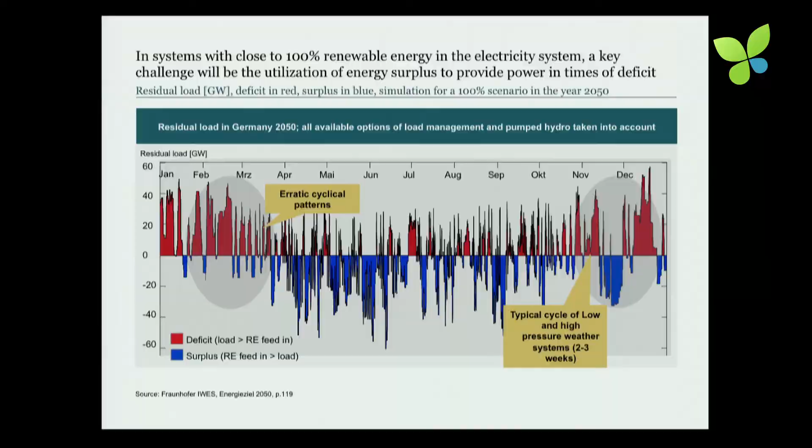And when you calculate these systems, there's a simulation of our colleagues from the Fraunhofer Institute of Wind Energy, then you can see you have to match a huge amount of energy excess into these time ranges where we need this from the point of the load, and therefore the task or the challenge will be high energy is incoming and you have to store it not only for hours, also for a huge amount of days, perhaps weeks or months, if we will feed a system with a 100% level of energy in the near future.

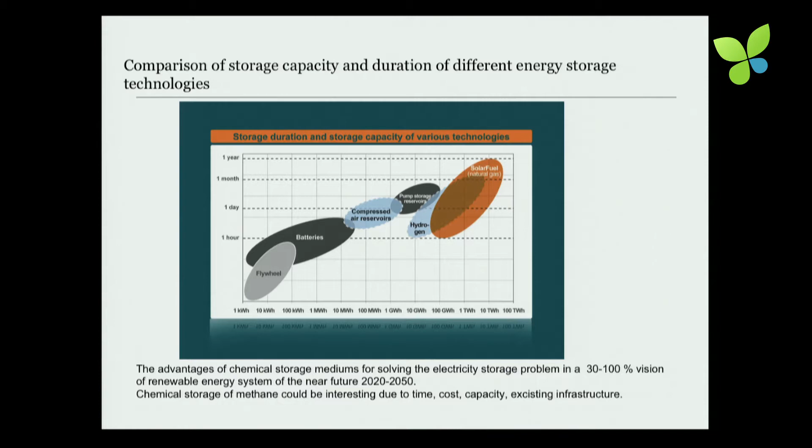And why is this important also to phase out a little bit about the possibilities of energy storages? Of course, we have the battery or flywheel systems which will feed us the energy for some minutes to some hours, perhaps, and we will need these energy systems, but in fact, you will see it on the right side, the chemical storage capacity of hydrogen or renewable methane, which is stored in an existing infrastructure, like the gas system, for example, then you can store a huge amount of energy and for a long time range. For example, not only for hours, you can store it for days or weeks, and charge in and charge out will cycle for these time ranges.

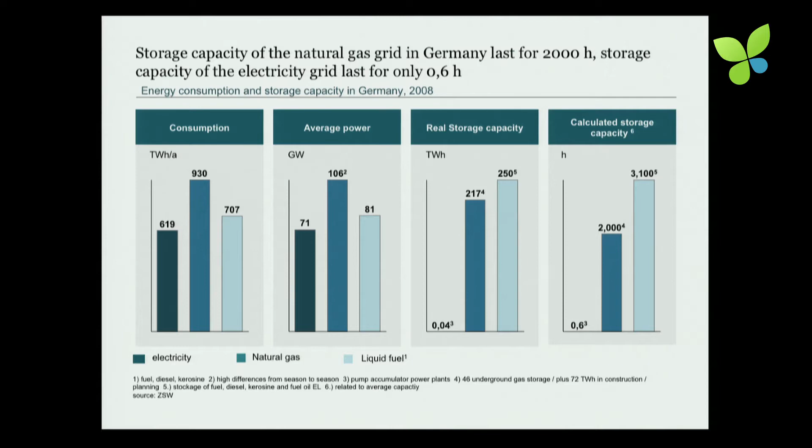And if you will see on the second bar here, the energy storage capacity of our existing electricity system, the bar on the left side, it is not a mistake. We have only energy from 40 gigawatt hours that will provide our system for approximately only half an hour or a little bit more, but not more at the moment, based on pump storage capacity in Germany, for example. And this will not be so different in a greater way if you combine it with Austria or Switzerland or Norway, because these systems also will be used by other countries and also face problems of connecting these units.

And if we can see the possibilities and capabilities of the natural gas system, this is the capacity of the natural gas system, which is existing, then you can see that it is quite a good idea, perhaps, to combine the gas system with this huge capacity of energy storage and its distribution system with the problem and the challenge of integrating and storing a huge amount of electricity.

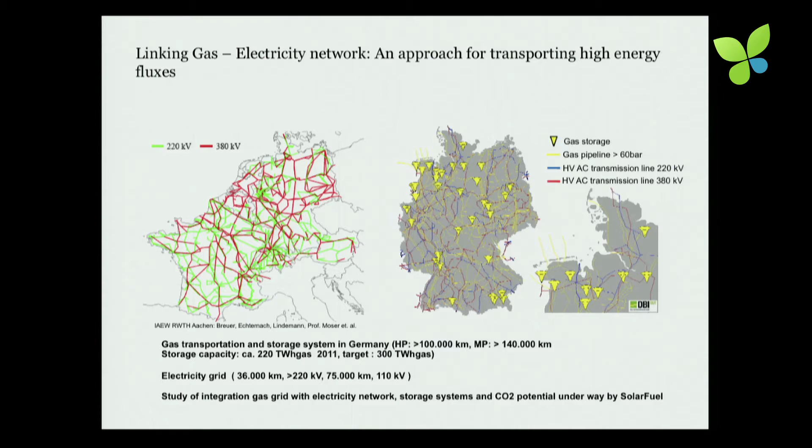And now the combination of this gas system with the electricity system is our basic principal idea. On the left side, you see the classical electricity systems faced by wind and solar energy, and we are matching our devices as a company which is engineering and procuring these energy devices like an electrolyzer unit and a methanation unit. And these two different units, we are combining. The system approach is our business.

And the electrolyzing unit, for example, to produce hydrogen, is a quite old technology, available since the mid 1900s. And we only adapt these available technologies for the future demand, for example, to operate it under dynamical behavior, facing the volatile fluxes of energy.

And the methanation, for example, is also an old technology. It was invented by a French mister in the 19th century, and he got a Nobel Prize for this technology in 1912, but nobody was interested to use CO2 as a reduction molecule to face it with hydrogen, for example, because nobody needed this. CO2 was an exhaust gas, but no reaction product for a carbon dioxide cycling economy.

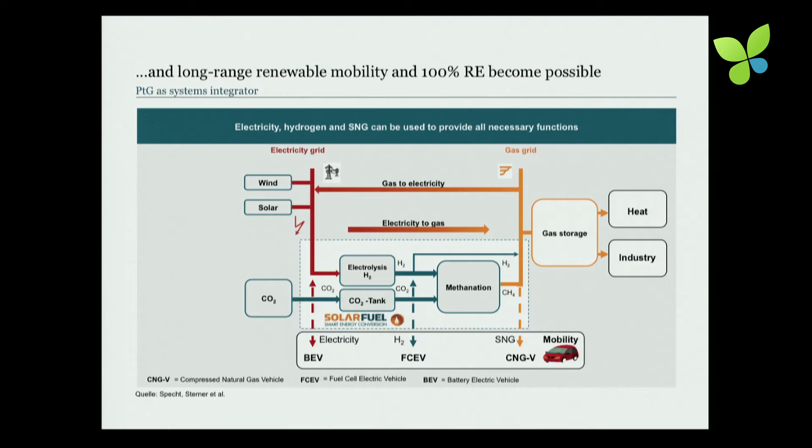And our basic idea is to integrate these devices based on electrolyzers and combining it with methanation. And the CO2 we will derive in the first approach from, for example, an existing system device as well. Biogas plants, for example: in Germany, we have over 7,000 biogas plants under operation, 10,000 sewage treatment plants, we have breweries and also ethanol production units as well, for example, steel and cement industry. These industries and these biogas plants are the most available CO2 sources at once.

We have not to invent or to build it up. This was not our business model. We want to face different existing systems and to connect these systems together, to put a part and an advantage for an integration technology. And if we had introduced the gas into the natural gas system, then of course we can reuse it for cogeneration, for example, for a gas turbine to produce electricity, but also the natural gas is available for heat or for mobility, for example, and that is also existing technologies.

And our basic principle is only to integrate it in the electrolyzer unit, which we will also buy from some manufacturing companies, and adapting these technologies in our way, in our efforts we need, and the matching of these electrolyzer units and the system integration with the methanation, which is also a technology which is quite available from the chemical fixed bed reactor, for example, which we also are adapting to our needs and system integration.

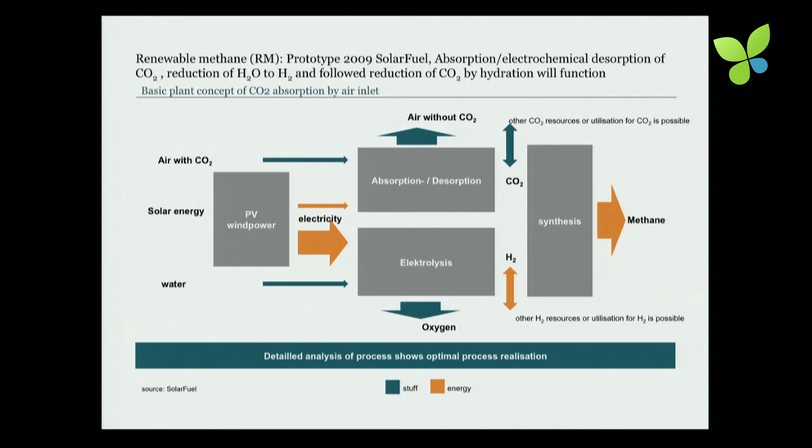And the electrolyzer, for example, I've brought up an example of the late 80s. In Germany, we had some experiences and technology available for electrolyzer units, for example, the alkaline electrolyzer units, which we are focusing on. And these experiences from our colleagues from the Center of Solar Energy and Hydrogen Technology, we are combining to a new approach of system integration.

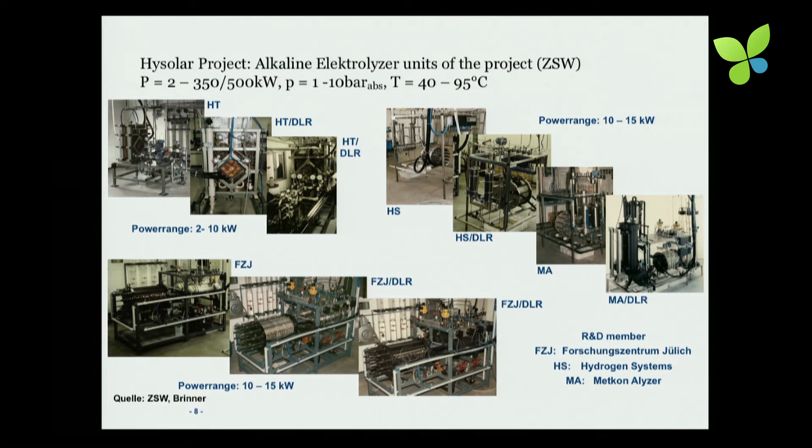Here you see some examples of former existing electrolyzer units, which had a better efficiency level and were also constructed for the operation under dynamic conditions. And we are reactivating these technologies. We don't want to invent a new way, that is not our business; reactivating and refurbishment, perhaps you can say, for this technology. And the basic principle is the electrolyzer unit, which is operated under the dynamic way of energy fluxes like wind and solar energy, which was done in the 80s, for example. There is no doubt about this.

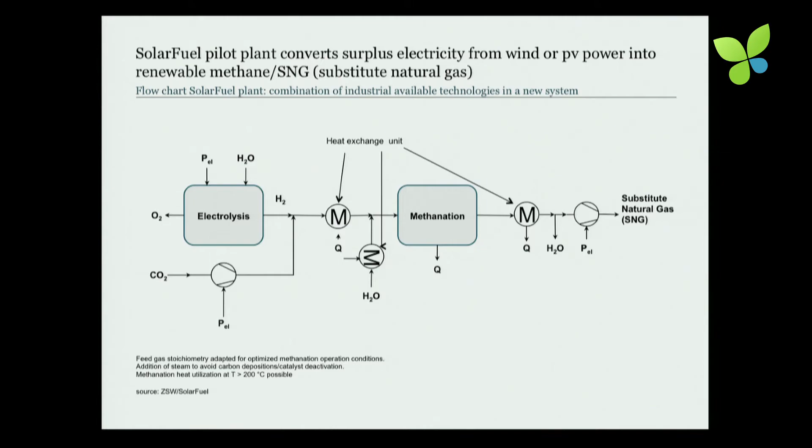This electrolyzer unit, we are connecting to the methanation unit, which is just only a tube, for example, where the feed gases are provided, CO2 and hydrogen from the electrolyzing unit, and then by passing this tube system and the catalysis reaction, you will get a natural gas similar product, a synthetic natural gas, SNG, we will call this product.

And this is a quite once-through flowing process. We have no additional cycles or stages at the moment, and we only want to integrate it in a quite similar way like it is done in the chemical industry as well, the so-called fixed bed reactor, for example.

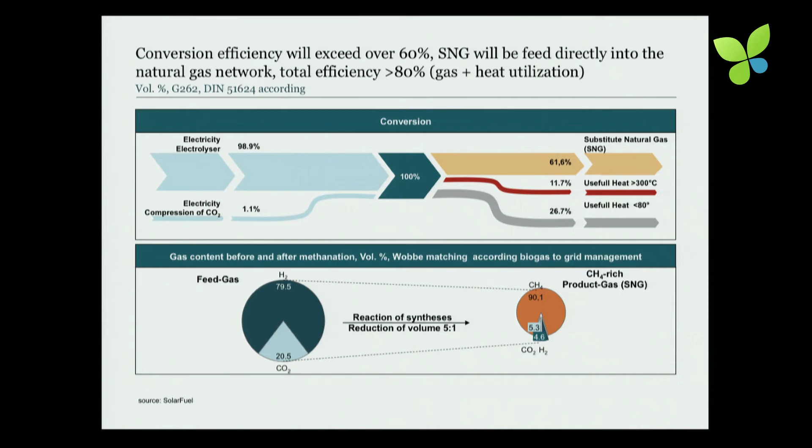It's an industrial application. And what we can get out from the yield of natural or synthetic gas is over 60% from the incoming 100% of electricity. 60% is the synthetic gas, which you can use in the natural gas system, and up to 30%, of course, normally it could be a loss, but we want to integrate like a cogeneration project where you also

use the heat from the lost side, and therefore we want to integrate it normally with biogas plants, which will need heat as well, or cogeneration projects, for example, to feed some local heat grid networks, to use this heat. And if you calculate the overall efficiency only from the point of electricity, it would only be 30 to 40% without any use of heat. But that is not our business for the future.

In Germany, we are facing more ways to integrate more cogeneration projects, and in this same way, we want to integrate the useful heat as well. And in the near future, we've seen that our basic pilot plant, which we built up in 2009, is underway and functioning. And by this biogas plant application in some locations in the northern and southern part of Germany, we tried the function of this basic system, and we've seen it is underway and it could function, and we can also feed some mobility devices as a consumption area.

And the basic advantage of a storage system from power to gas means you can use the gas which you've produced by electricity not only to reuse it for electricity, you can also feed mobility, long distance mobility. You can feed fuel or combustion for shipping, for aircraft, for example, as well as for chemistry.

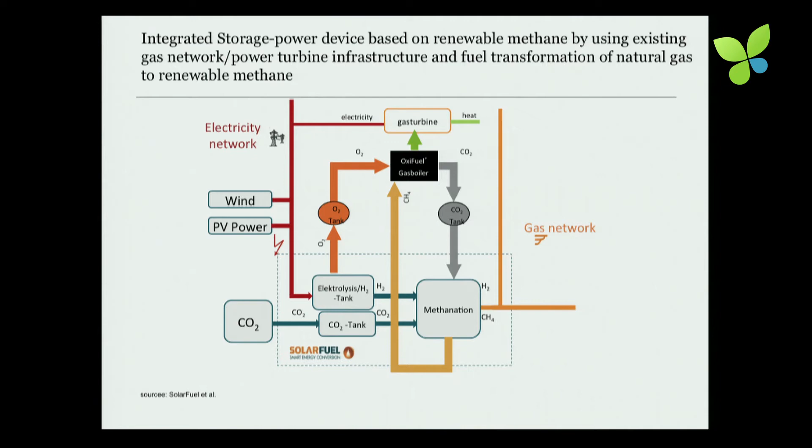Everything is possible, and you can also feed a classical gas turbine with our system to combine the CO2 in a cycling way, so that you only use the CO2 as a cycling product, as a raw material to store energy, but you feed it in a cycling process with an existing technology like a gas turbine, for example. That is possible. And one of our quite interesting customers at the moment is a mobile application.

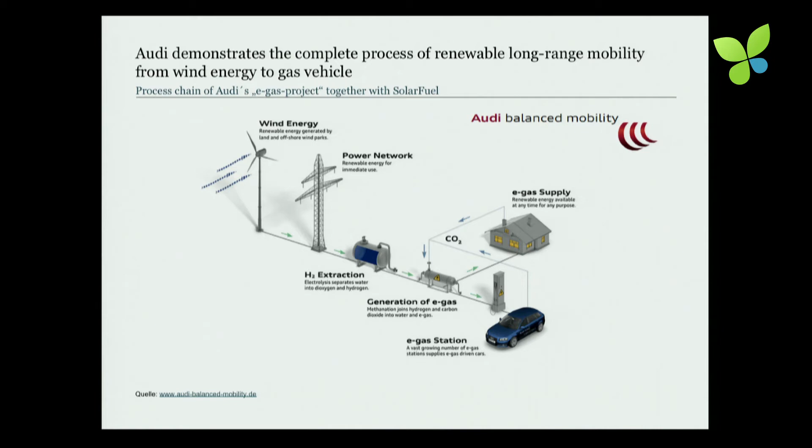Audi invested in a first industrial biogas plant with our facility, which we are now integrating at this plant size in the northern part of Germany, and we are building up this device at the moment until 2013. And Audi can now, with the produced power to gas, deliver to its serial applications in 2013 a classical serial CNG vehicle, that means compressed natural gas vehicle. They could combine it with natural gas fed by renewable electricity, renewable methane. It is our basic principle.

That's our projects underway, which we are now focusing on. Not only the Audi project, we also have some other smaller projects under construction. And the next step of integrating the technology will be in 2015. We will provide the market with project plant sizes from 1 to 20 megawatts. Every project could be matched and planned to the size of the needs. And this could be the market for power to gas to integrate renewable energy for a system that will face all challenges in the current and future needs.

Thank you very much.

Solarfuel is a very good example of a small startup company that looks very big already. But you actually took the opportunity of working with 2 research institutes and using their technology, and you are basically integrating. It's Fraunhofer and the ZSW in Baden-Württemberg and Stuttgart. Let's go a little bit back to the beginning. How did you come up with the idea of creating this startup company?